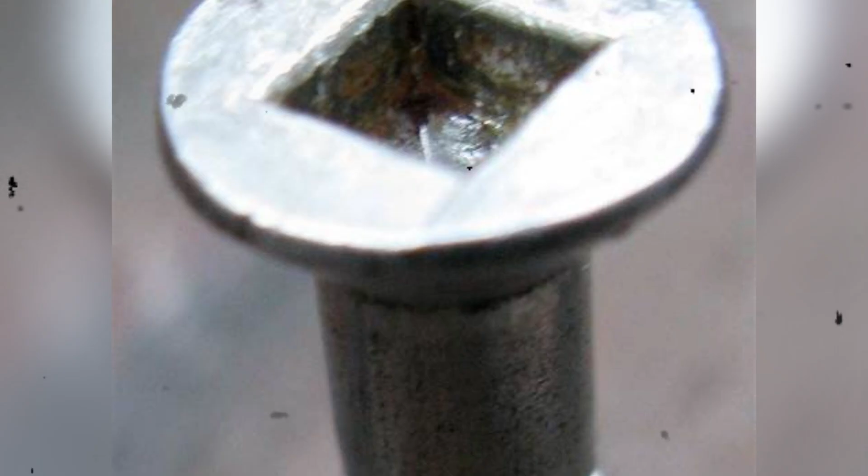In 1914, inside the sprawling automotive assembly plants of the Ford Motor Company, a small piece of Canadian hardware was quietly altering the speed of industrial production. It was a cold-formed screw with a recessed square drive, manufactured in a red brick factory in Milton, Ontario. It did not slip, it did not strip, it did not cam out under the pressure of power drivers.

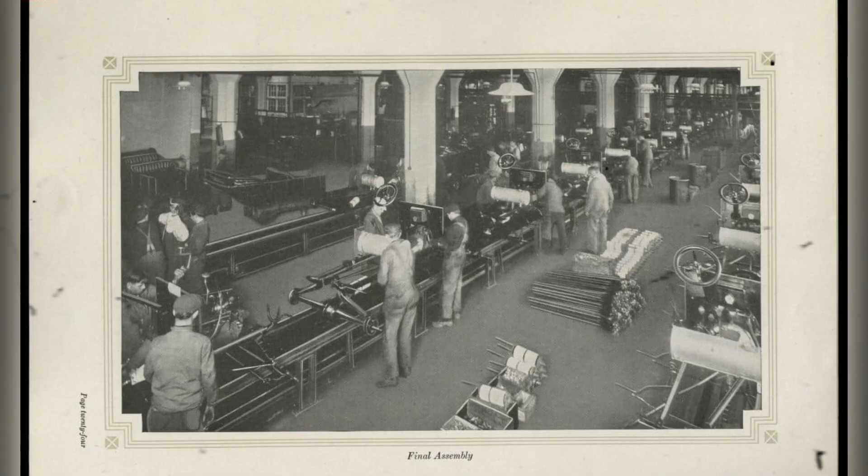Records suggest this single Milton export saved Henry Ford approximately 2 hours of assembly time per vehicle. It reduced wood damage. It prevented assembly line injuries. It was, by every mechanical measure, a flawless industrial fastener. Ford wanted it for every factory. He demanded the exclusive rights to manufacture the square drive screw in the United States.

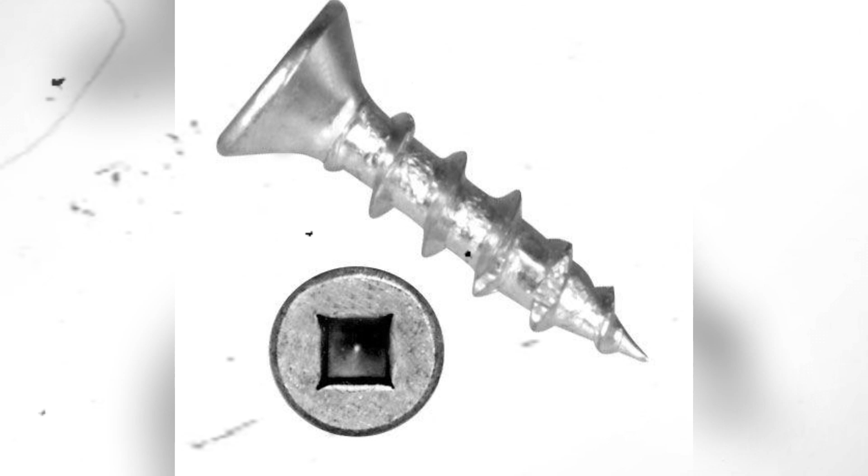But the inventor sitting in Milton refused to surrender control of his patent. He would not license the manufacturing rights. He demanded that every screw be purchased directly from his Canadian plant. That single negotiation sealed the fate of the Robertson screwdriver. It created a profound industrial paradox.

Inside Canada, the Robertson drive became the undisputed standard of the trades. Its color-coded handles, green, red, and black, would eventually populate every carpenter's belt, every logging camp workshop, and every hardware store aisle from Nova Scotia to British Columbia. It completely locked the American Phillips drive out of the domestic Canadian construction industry.

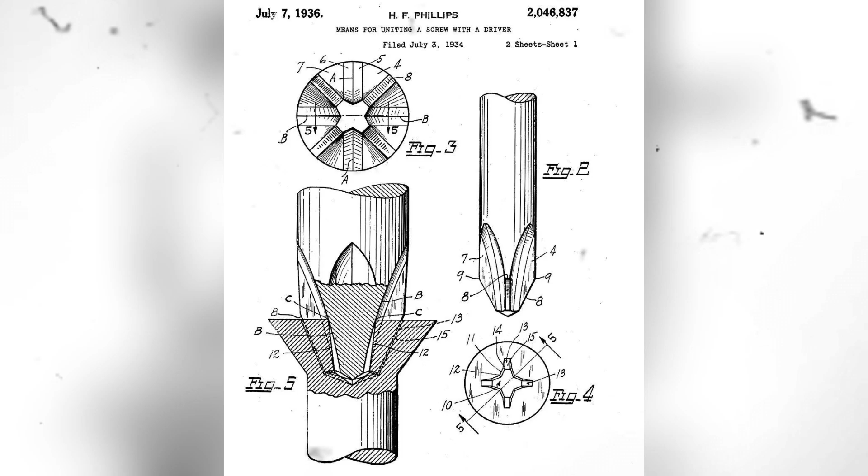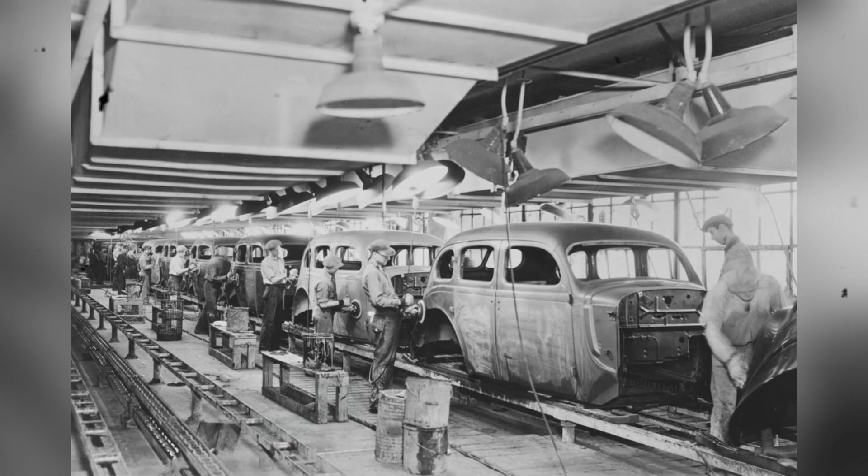But outside the Canadian border, the square drive was practically exiled. The Milton Empire secured its domestic dominance at the cost of global expansion. Decades later, the original Ontario production lines would halt, the foundational company would be absorbed by American corporate conglomerates, and the ultimate Canadian hand tool would be stripped of its independence. The perfect screw survived, but the Canadian tool-making empire behind it was slowly dismantled.

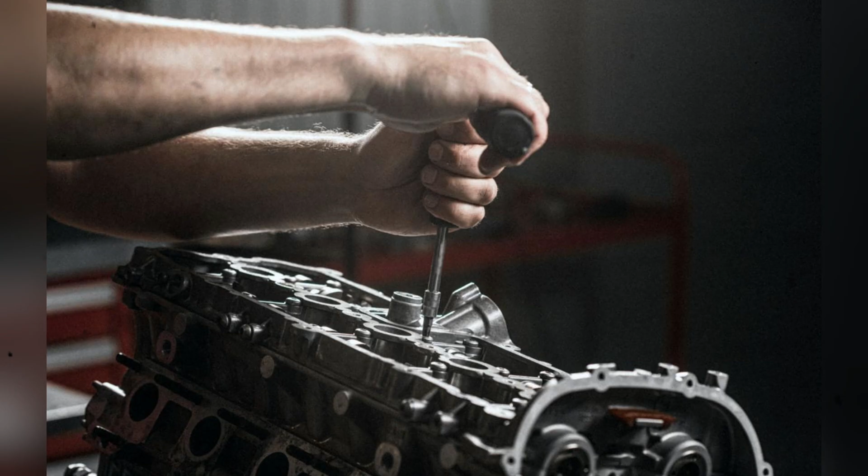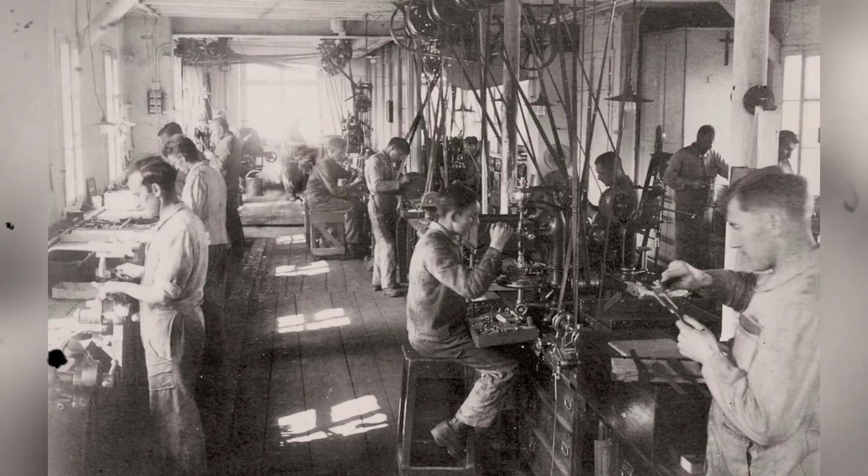When a carpenter applied torque, the blade inherently wanted to push itself out of the screw head. This mechanical rejection is known as cam out. For decades, cabinet makers in Ontario, boat builders in Nova Scotia, and mechanics in early Montreal automotive shops accepted cam out as an inevitable cost of doing business. They accepted the stripped screw heads. They accepted the gouged wood. They accepted the bloody knuckles.

The Canadian manufacturing sector was rapidly accelerating toward mass production. The era of pure craftsmanship was giving way to the era of assembly lines. Yet this entire industrial system was held back by a fastener that could not be reliably driven at high speed. The slotted screw was a bottleneck on the factory floor. It required two hands to operate, one to hold the screw and one to turn the driver.

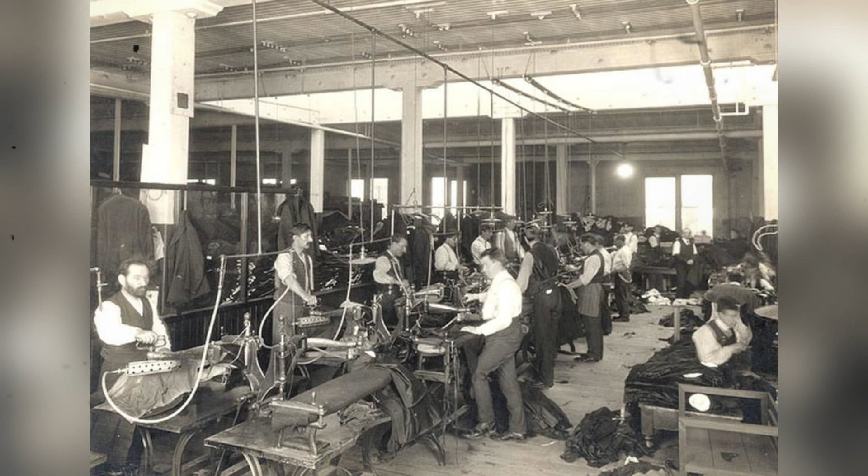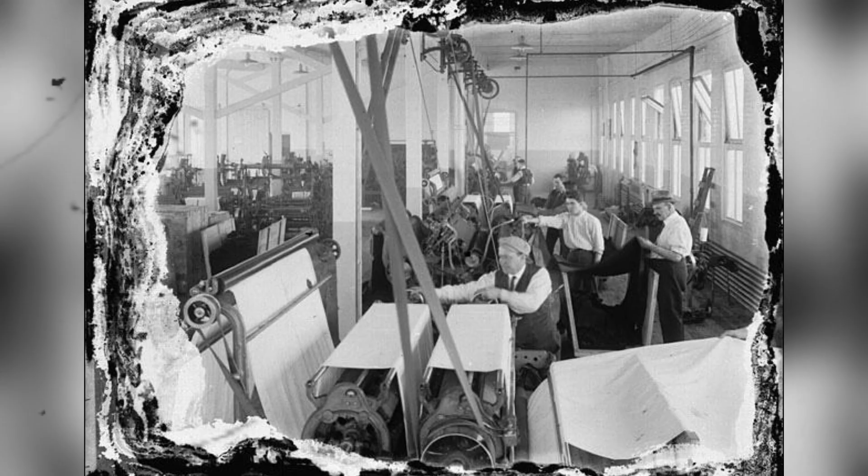If an early electric or pneumatic driver was applied to a slotted screw, the tool would violently jump from the slot, destroying the workpiece and stalling production. The Canadian industrial economy desperately needed a fastener that could handle immense rotational force without failing. The solution was born from physical injury.

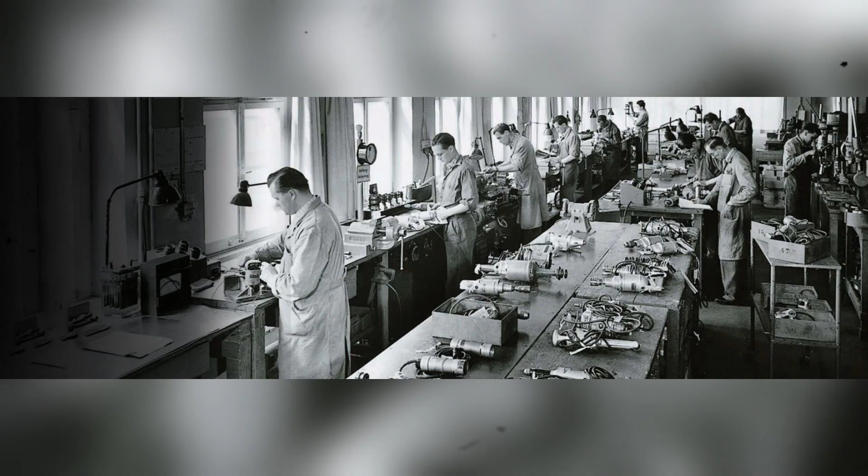Peter Lymburner Robertson was a traveling salesman from Seneca Township, Ontario. By one account, he was demonstrating a spring-loaded screwdriver to a group of potential clients on the streets of Montreal. As he applied pressure, the flat blade violently slipped from the slotted screw. The steel drove deep into his hand. It was a severe cut, but it crystallized a mechanical truth. The straight slot was fundamentally obsolete.

A recessed drive, a socket that could physically capture the tip of the screwdriver and lock it in place, was the only logical path forward for modern manufacturing. The concept of a square drive screw was not entirely new. European and American inventors had theorized it for years, but previous attempts had universally failed at the manufacturing stage.

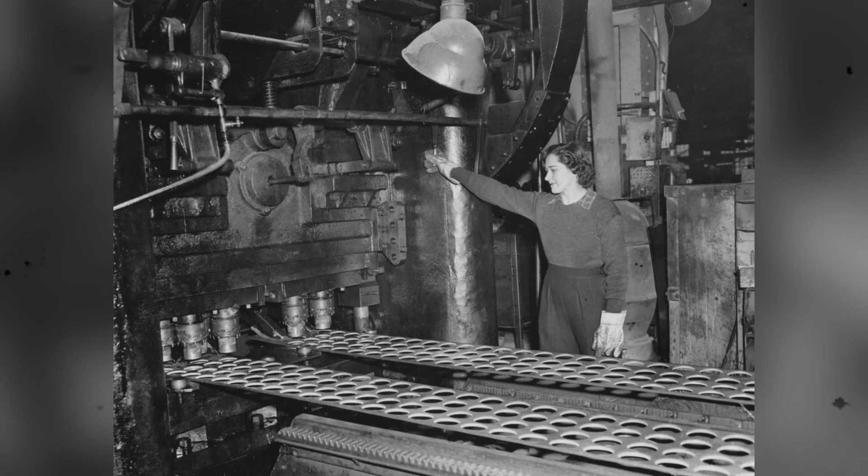If a factory tried to cut, mill, or punch a square hole into a heated screw head, the surrounding metal would weaken. The corners of the square would easily strip out under the pressure of a screwdriver. The fastener would fail before the wood was clamped tight. Robertson's genius was not just the shape of the recess, but the precise method of forging it. He developed a proprietary cold-forming process.

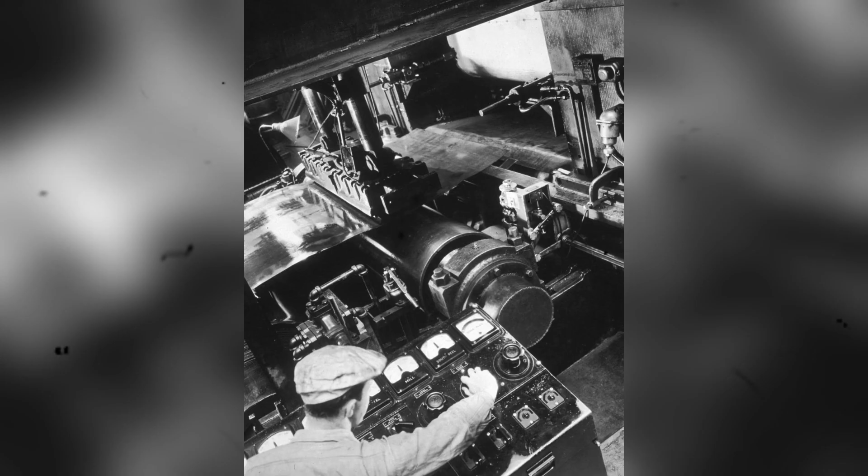A hardened steel punch would strike the cold steel wire with immense force, simultaneously shaping the dome of the screw head and pressing the tapered square recess deep into the metal. Because the steel was not heated or cut, the cold-forming process heavily compressed the metal grain around the socket. It made the walls of the square recess drastically stronger than the surrounding metal.

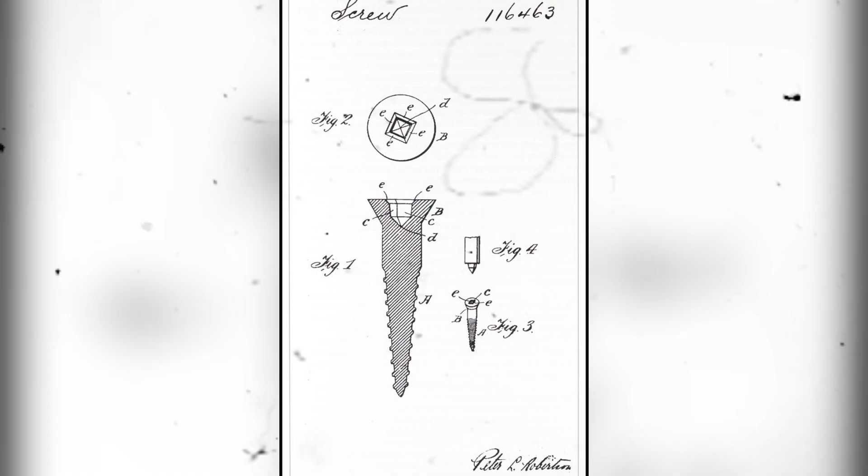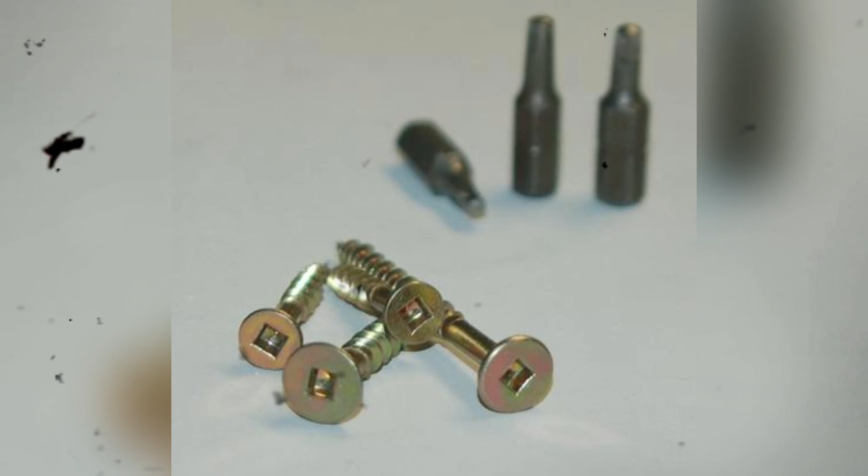It was a flawless manufacturing method. It produced a screw that was virtually indestructible under normal torque. In 1908, Robertson patented his cold-formed square drive screw. He now needed a manufacturing base to scale his invention. He found it in Milton, Ontario, a growing industrial town west of Toronto.

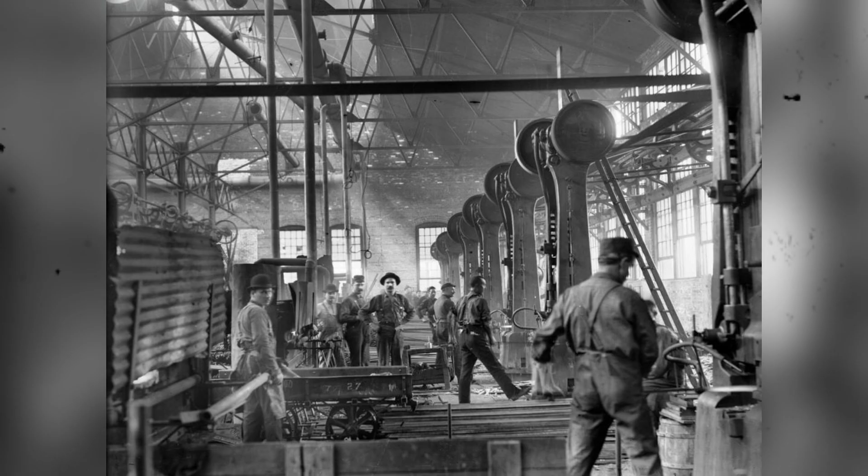The town recognized the potential of his patent and offered a municipal loan, a tax exemption, and the necessary infrastructure to build a serious tool-making operation. The P.L. Robertson Manufacturing Company was officially established in a modest brick facility on Bronte Street.

Getting the square drive screw into the Canadian market required overcoming massive industrial inertia. Factories across the country already possessed millions of slotted screws and thousands of flathead screwdrivers. Transitioning to a proprietary fastener meant changing entire workshop supply chains. Robertson aggressively marketed his invention directly to local tradesmen. The initial Canadian entry occurred through persistent demonstrations to local woodworkers and small-scale manufacturers in southern Ontario.

When a Canadian carpenter tried the Robertson screw for the first time, they discovered a radical new capability. The slight taper of the square recess allowed the screw to physically cling onto the matching tip of the screwdriver. This friction fit, known as cling, meant a worker could place the screw on the driver, extend their arm, and drive the fastener into the wood using only one hand. They did not need to hold the screw. They could drive it upside down. They could drive it at awkward angles.

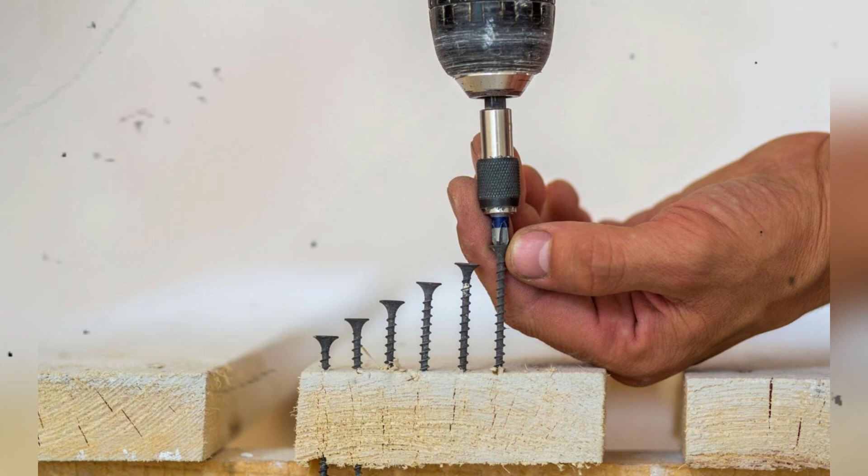The early reception in Canadian industrial circles was an absolute revelation. The T. Eaton Company, a titan of early Canadian retail and manufacturing, began using Robertson screws in their massive Toronto furniture factories to drastically speed up cabinet assembly. Early automotive bodybuilders, such as the Fisher Motor Company in Walkerville, Ontario, recognized that the square drive entirely eliminated the devastating paint scratches caused by slipping screwdrivers on assembly lines.

Local hardware stores across Halton County began stocking the new fastener, and tradesmen quickly realized its superiority over anything imported from the United States or Great Britain. The Milton factory began running at capacity. Local hardware catalogs started dedicating space to the unusual square hole. The local trades had spoken. The Canadian workshop needed a fastener that would not slip, strip, or fail under pressure.

P.L. Robertson had delivered it, and the stage was set for an unprecedented expansion into the very heart of North American heavy industry. The shift from a small Milton operation to a national industrial titan required more than just local word of mouth. It required a fundamental mechanical superiority that could be mathematically proven on a balance sheet.

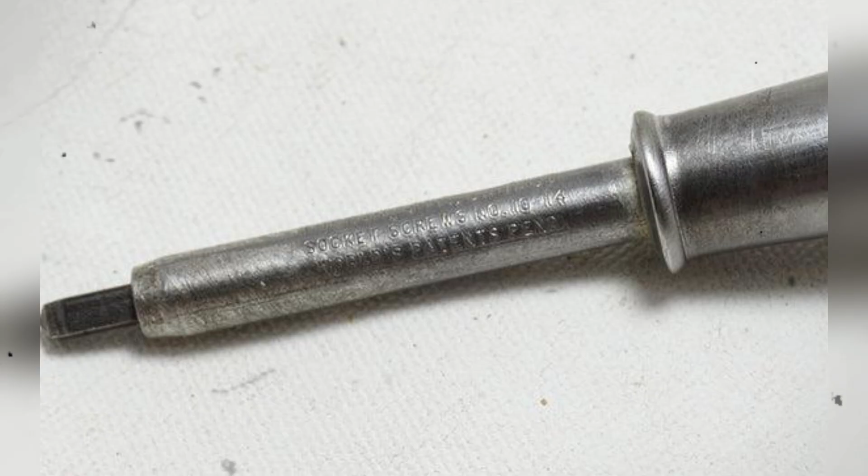The physical architecture of the Robertson fastening system was deceptively simple, yet perfectly engineered for the realities of early 20th century mass production. The recess in the screw head was not a simple punch box. It was a carefully designed, slightly tapered square socket. The matching screwdriver tip featured the exact same precise taper. This specific geometry achieved two critical mechanical functions that the straight slotted screw could never replicate.

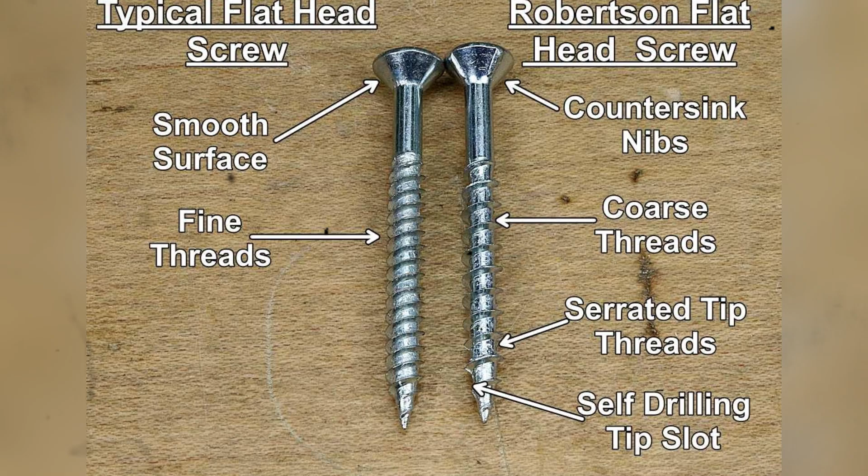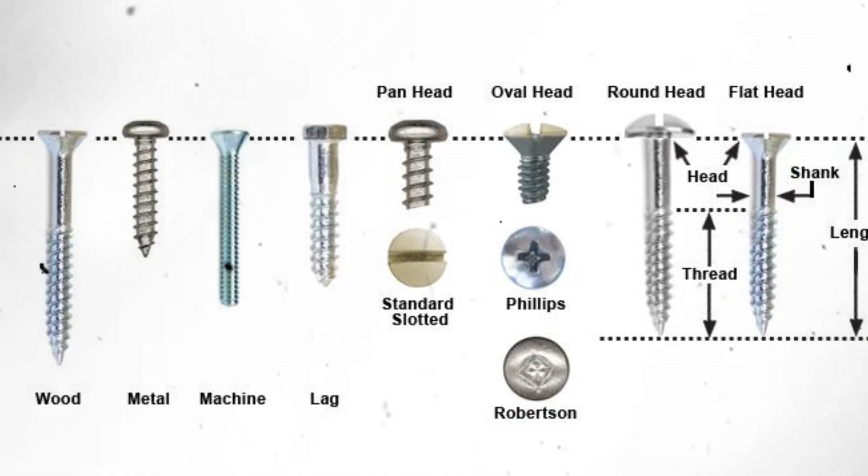First, the square drive distributed the rotational force evenly across the four interior walls of the screw head, rather than concentrating it entirely on a single thin, fragile slot. This massive increase in surface contact allowed workers to apply extreme torque without breaking the screw. Second, the slight taper created an interference fit. When the steel driver was pushed into the steel screw, the two pieces of metal physically wedged together. This mechanical wedge created cling.

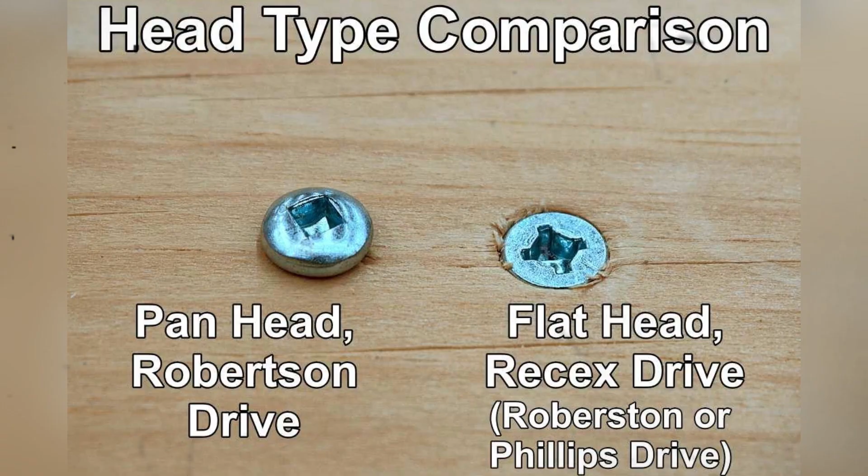A mechanic or carpenter could load a fastener onto the driver tip, extend their arm, and swing the tool like a hammer without losing the screw. In the chaotic, cramped, and rapid environment of an assembly line, the ability to drive a fastener entirely with one hand was an industrial revelation. It freed the worker's second hand to hold the workpiece, position the material, or stabilize their own body. But a brilliant design is useless if it cannot be manufactured at scale.

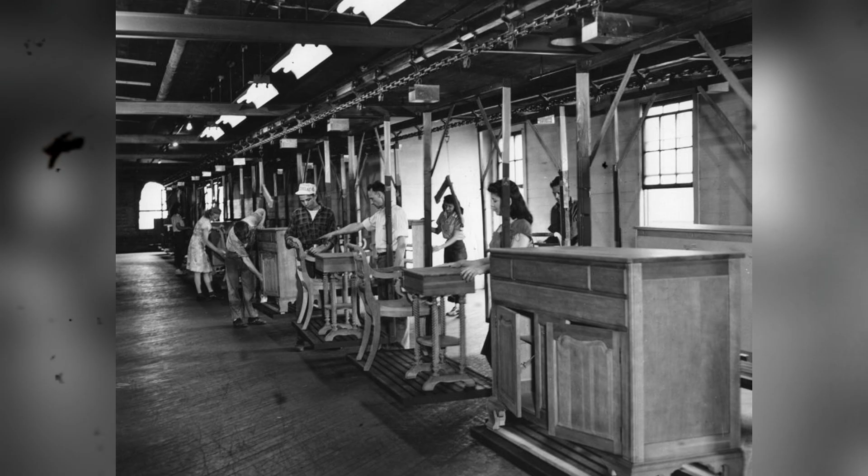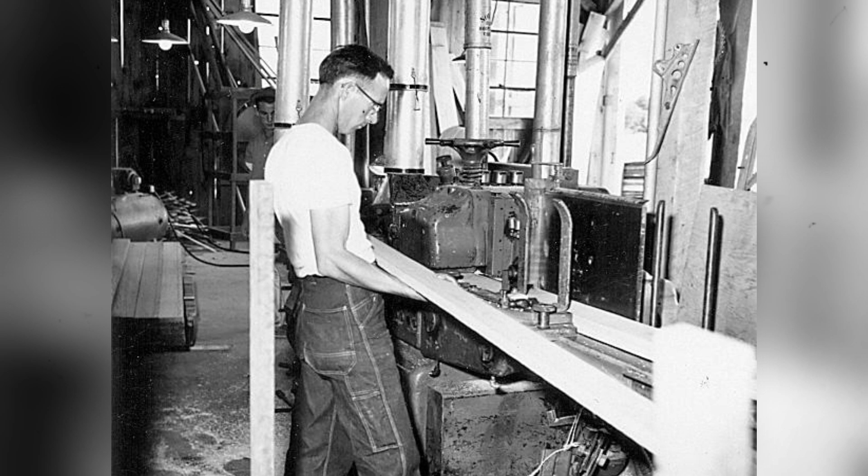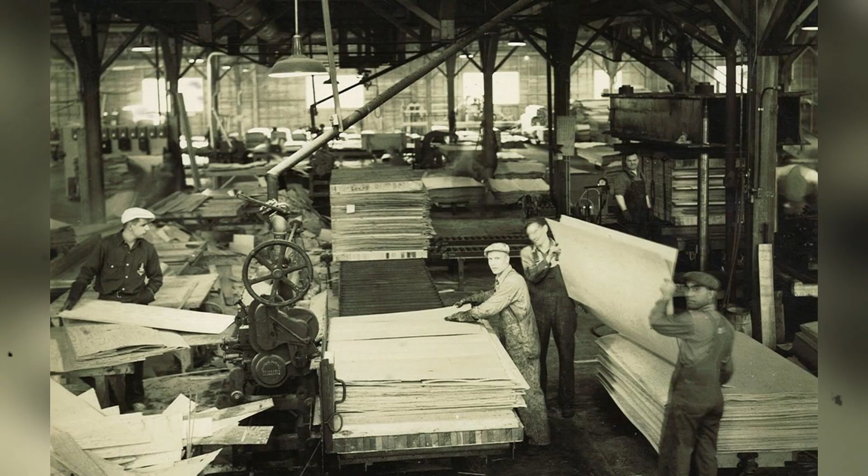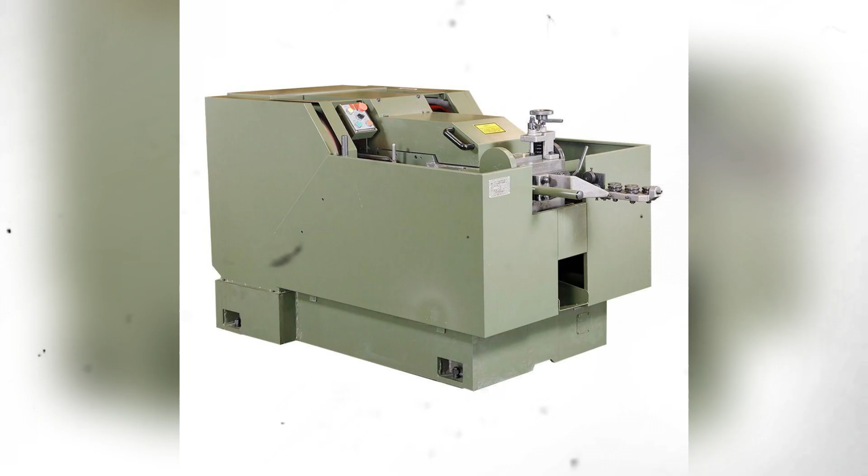P.L. Robertson's ultimate Canadian moat was his proprietary cold-forming process. To create the perfect square recess, raw, unheated steel wire was fed into massive, violently loud heading machines in the Milton factory. A hardened steel punch struck the wire with thousands of pounds of pressure, instantly forging the dome of the screw and driving the square hole deep into the center. Because the metal was not heated or cut, the cold-forming process heavily compressed the microscopic grain structure of the steel around the socket. It hardened the walls of the drive. It created a fastener that was virtually indestructible under the intense torque of industrial machinery.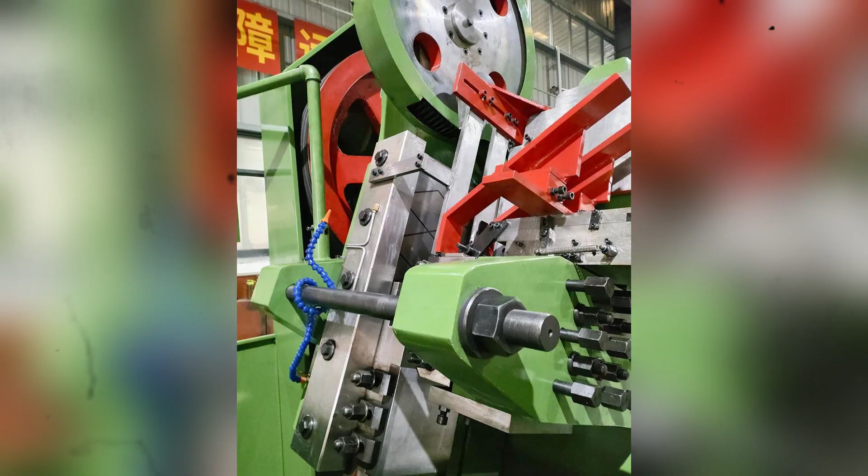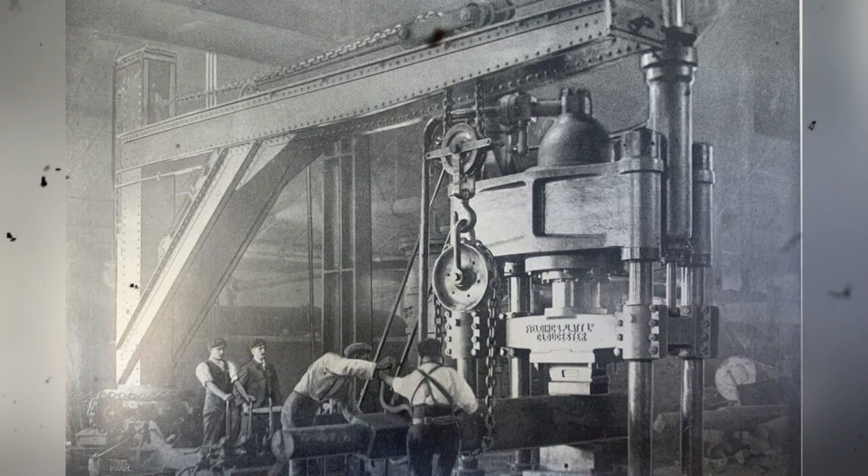The Canadian price context was initially challenging. Robertson screws were slightly more expensive to manufacture per unit than traditional slotted screws. But for large-scale manufacturers, the raw cost of the fastener was irrelevant compared to the cost of human labor and damaged materials. The slotted screw was a liability. When a driver slipped from a slotted screw, the inevitable cam-out, it frequently gouged the surrounding wood, ruined finished surfaces, and slashed the hands of the workers.

The Robertson screw eliminated cam-out. It eliminated the ruined dashboards. It eliminated the bloody knuckles. It eliminated the wasted hours spent extracting stripped fasteners. The ultimate breakthrough occurred when the Canadian automotive industry recognized this economic math.

In Windsor, Ontario, the Ford Motor Company of Canada was rapidly expanding its assembly lines to meet the exploding demand for the Model T. Early automobiles were heavily constructed of wood. Their frames, floorboards, and interior structures required thousands of driven fasteners per vehicle.

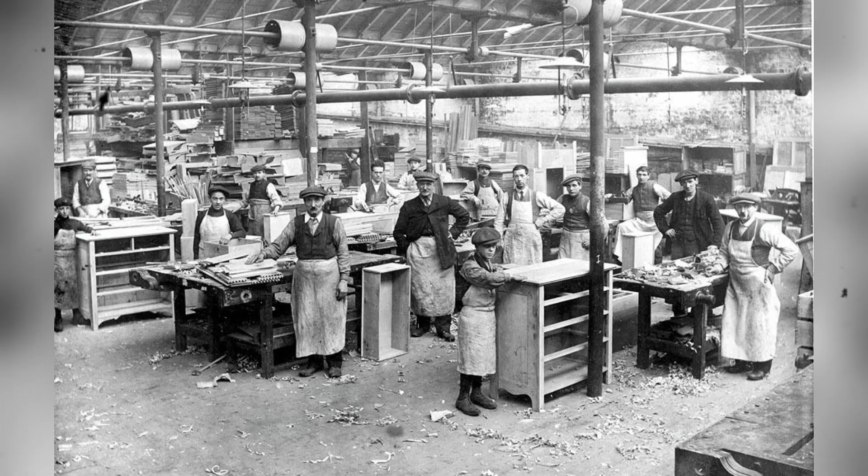When Ford of Canada adopted the Milton-made square drive, the acceleration in production was staggering. Available reports indicate that the Robertson screw saved Ford assembly lines roughly 2 hours of labor per vehicle. In the high-volume, hyper-efficient world of automotive manufacturing, 2 hours of saved time was a monumental competitive advantage.

The success in Windsor triggered a massive cascade across Canadian heavy industry. The Fisher Body Company in Walkerville, Ontario, which built the wooden bodies for numerous early automotive brands, placed massive orders with the Milton factory. The square drive allowed their workers to safely use early motorized and pneumatic driving tools, a process that was previously impossible with slotted screws.

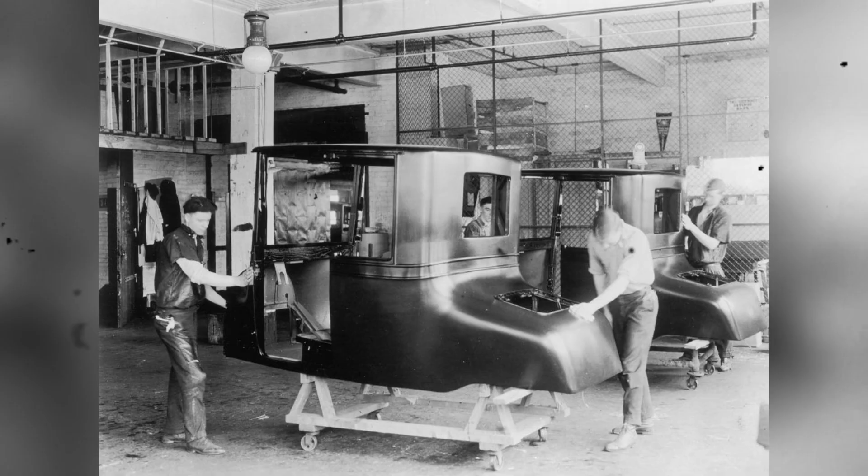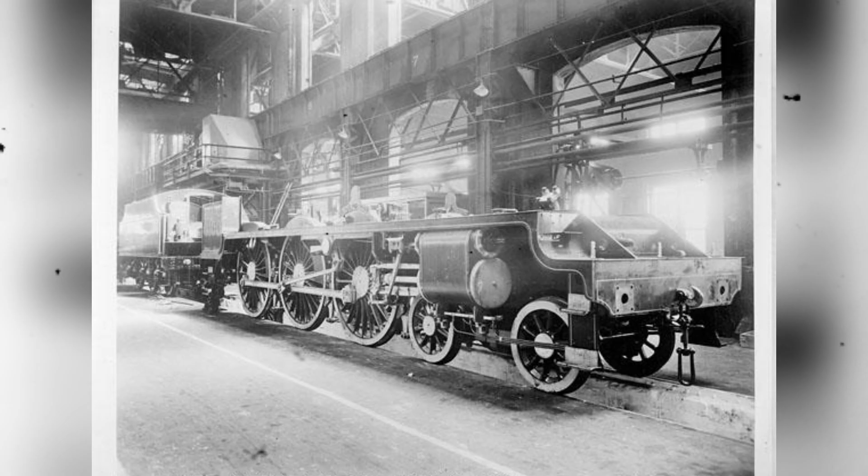This industrial adoption quickly spread beyond the automotive sector. The Canadian Pacific Railway operated the colossal Angus shops in Montreal, Quebec. It was a sprawling industrial complex where thousands of wooden boxcars and passenger carriages were constructed. The Angus shops required a fastener that could withstand the intense, constant vibration of rail travel, yet be driven fast enough to keep up with rolling assembly quotas. They adopted the Robertson drive.

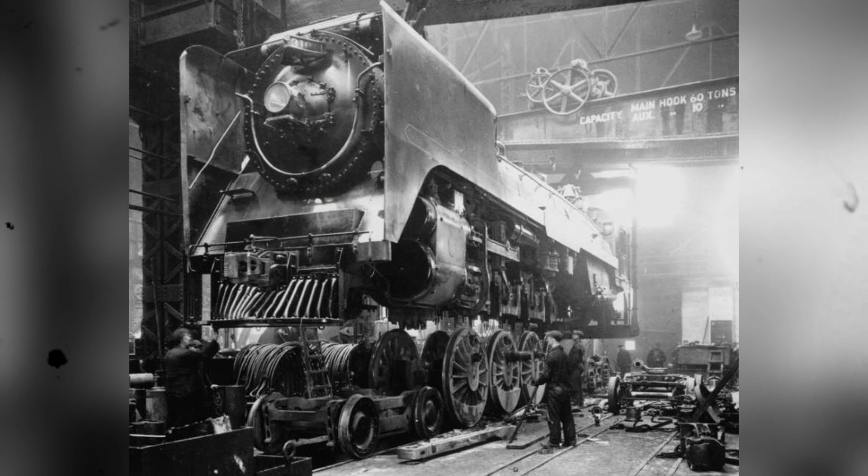The Russell Motor Car Company in Toronto integrated the fasteners into their production. The T. Eaton Company in Toronto, operating massive furniture manufacturing divisions to supply their national catalogs, transitioned their cabinet makers to the square drive. Suddenly, the Robertson screwdriver was no longer just an automotive assembly tool. It was bleeding out into the general Canadian trades.

As thousands of factory workers used the square drive at work, they began demanding it for their own personal toolboxes. Plumbers, electricians, and carpenters across Ontario realized that their traditional slotted screwdrivers were obsolete. The Milton factory aggressively expanded its distribution network to meet this demand. They secured contracts with major Canadian hardware distributors and local mercantile stores. From Halifax to Vancouver, hardware shelves began stocking the distinctive square-tipped drivers alongside massive wooden crates of Robertson fasteners.

P.L. Robertson had built a flawless industrial fortress. He held the patents. He controlled the proprietary cold-forming machinery. He dictated the manufacturing tolerances. He owned the Milton plant. He had successfully embedded his exact specific standard into the assembly lines of the nation's largest manufacturers and the toolboxes of the nation's independent tradesmen. The Canadian workshop was completely transformed, and the Robertson manufacturing empire was poised to enter an era of unprecedented glory.

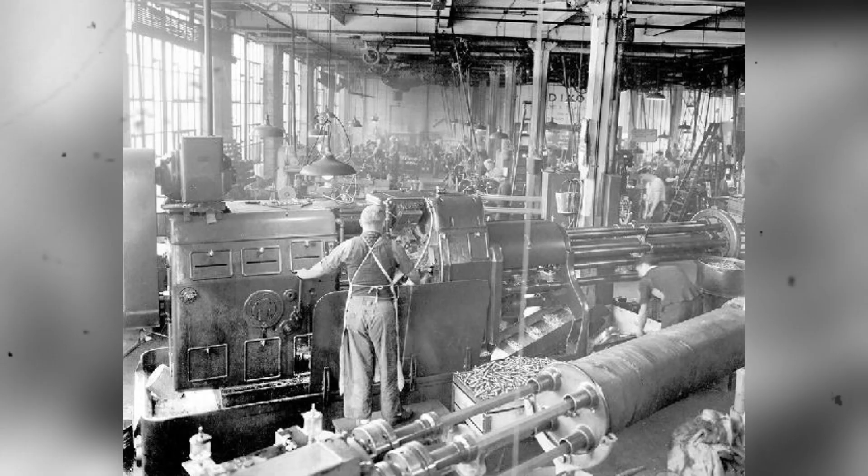By the middle of the 20th century, the P.L. Robertson Manufacturing Company was no longer just a successful local business. It was the gravitational center of the Canadian hardware industry. The original brick building on Bronte Street in Milton had metastasized into a sprawling, multi-acre industrial fortress. It was a self-contained empire of steel, noise, and constant production.

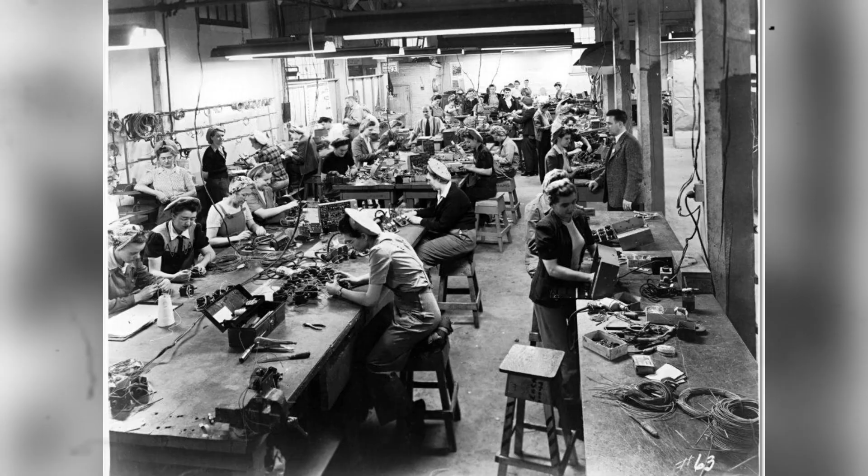The town of Milton essentially synchronized its daily rhythm to the factory whistle. Generations of Halton County families walked through the factory gates, manning the violent, deafening cold-heading machines that continuously punched raw steel wire into perfect square drive fasteners.

The true scale of the Robertson Empire was forged during the Second World War. When the Canadian government mobilized its manufacturing sector for the war effort, the demand for reliable, high-speed fasteners skyrocketed. Slotted screws were a liability in wartime production. There was no time for stripped heads, delayed assembly, or gouged aluminum. The Milton factory became a critical military supplier.

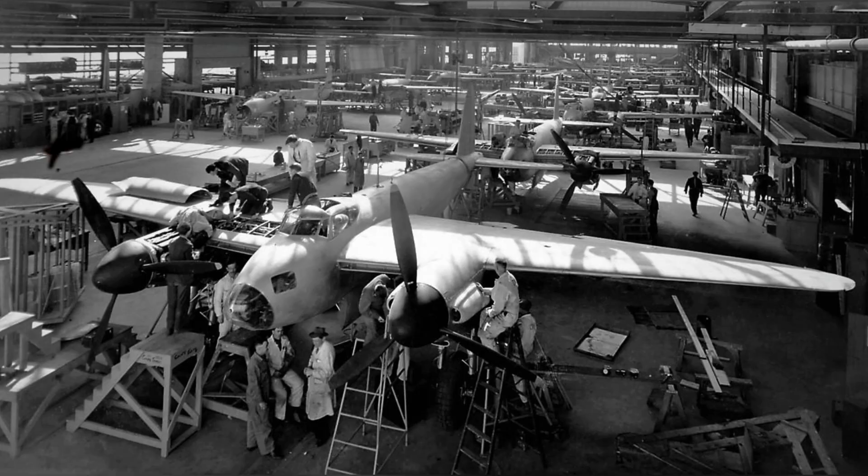When Victory Aircraft in Malton, Ontario, began constructing the legendary de Havilland Mosquito bombers, aircraft famously built almost entirely of wood, they relied heavily on Robertson screws. The precise, slip-free drive was essential for assembling the delicate, high-stress wooden airframes without damaging the surrounding material. On the eastern coast, the sprawling Halifax shipyards in Nova Scotia utilized immense quantities of Milton fasteners to construct the wooden interiors and electrical panels of Royal Canadian Navy corvettes.

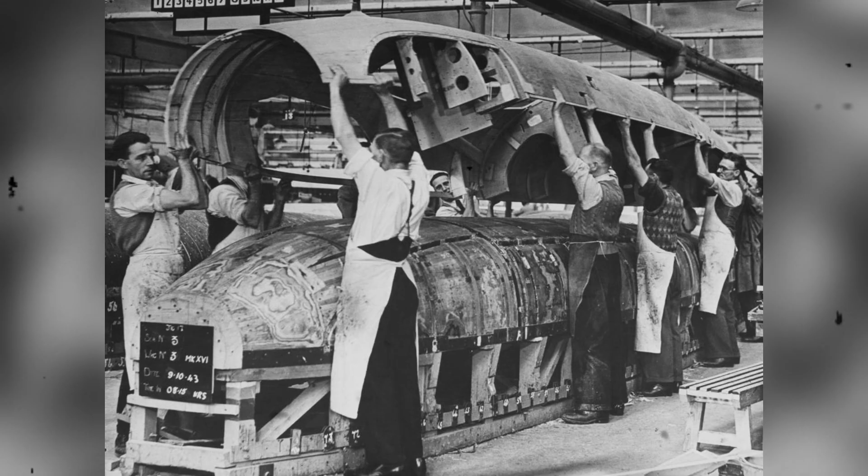The war effort required speed, standardization, and absolute reliability. P.L. Robertson delivered all three. The factory operated around the clock, churning out tens of millions of fasteners a month to feed the Canadian war machine. The square drive proved it could withstand the brutal conditions of military assembly lines just as flawlessly as it had conquered the Ford automotive plants decades earlier.

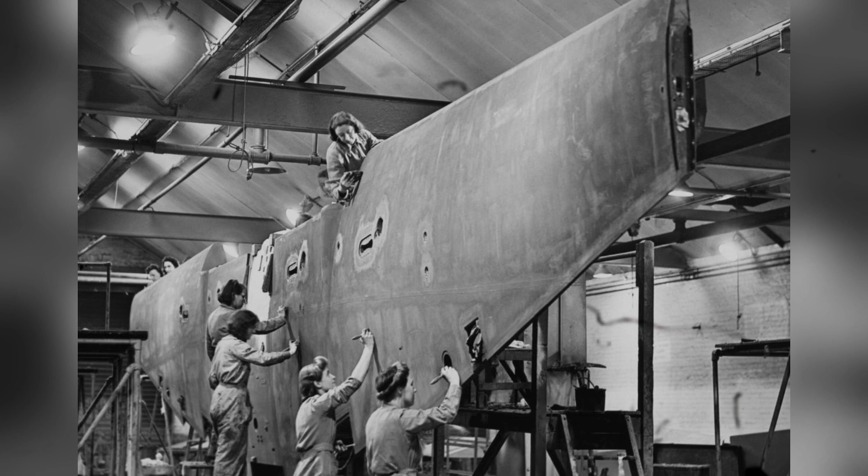When the war ended, the Milton plant did not slow down. It immediately pivoted to supply the greatest construction boom in Canadian history. The creation of the Canada Mortgage and Housing Corporation, or CMHC, triggered an unprecedented explosion of suburban development. Millions of new homes were built across Ontario, Quebec, and the western provinces. Every single one of those homes required hinges, floorboards, electrical boxes, cabinetry, and door frames. The Canadian construction industry universally standardized on the square drive.

It was during this post-war explosion that the Robertson Empire codified its most brilliant and enduring cultural innovation, the color-coded handle system. To help tradesmen instantly identify the correct screwdriver size in a dark toolbox or a cluttered workbench, the Milton factory implemented a universal visual language.

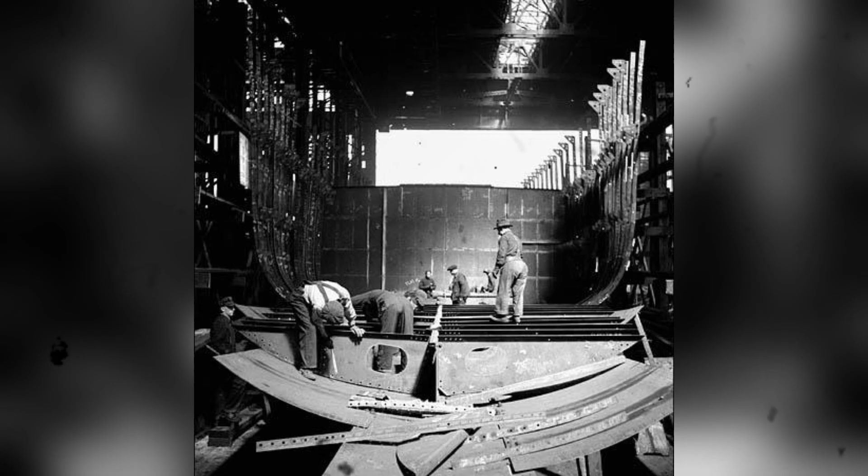The number 0 drive, used for fine cabinet work, was assigned a yellow handle. The number 1 drive, the standard for hinges and smaller hardware, was given a green handle. The number 2 drive, the absolute workhorse of the Canadian construction industry, used for framing and general carpentry, received the iconic red handle. The heavy-duty number 3 drive, reserved for massive structural screws, was marked with a black handle.

This color system bypassed the need to read small stamped numbers on a steel shank. A carpenter on a scaffold in Toronto could look down at his belt, see the red acetate handle, and instantly know he had the correct tool for the number 2 fastener in his hand. It was a triumph of Canadian industrial design. The yellow, green, red, and black handles became the unofficial flag of the Canadian tradesman.

Trade schools across the country, from the vocational programs in Vancouver to the technical institutes in Montreal, exclusively taught their apprentices using Robertson drivers. A generation of Canadian carpenters, electricians, and plumbers learned their trade holding a Milton-made tool. They learned the feeling of the interference fit. They learned the speed of one-handed fastening.

The straight slotted screwdriver was effectively banished from the professional Canadian job site, relegated to the bottom drawer, used only for prying open paint cans or scraping dried glue. The Canadian workshop had completely assimilated the square drive. It was no longer just a tool, it was an expectation.

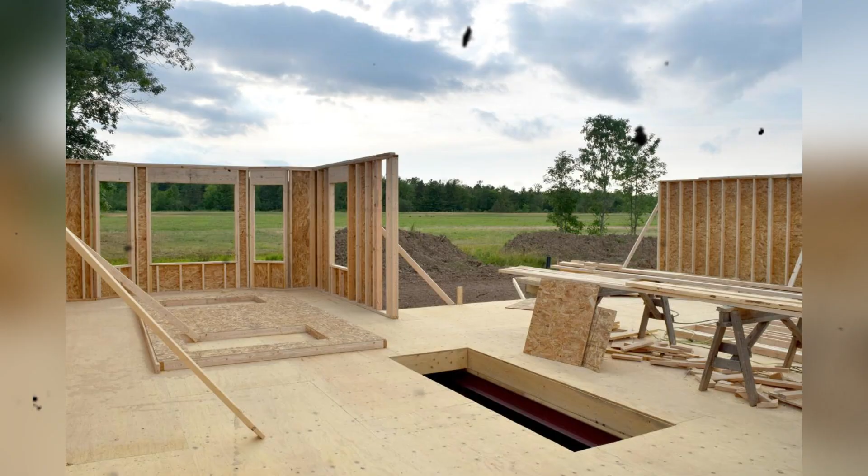The retail conquest of the Canadian market was absolute. When a tradesman walked into a Canadian Tire store in the 1970s, they were not looking for a generic fastener. They were looking for the iconic green cardboard boxes printed with the P.L. Robertson name. Entire aisles were dedicated to the Milton Empire. Massive pegboards displayed rows of acetate-handled screwdrivers, categorized strictly by the yellow, green, red, and black color system.

The distribution network stretched from coast to coast. J.H. Ashdown Hardware in Winnipeg, the massive Western mercantile giant, shipped trainloads of Robertson fasteners across the prairies to supply agricultural repair shops and local hardware dealers. In St. Jacobs, Ontario, the newly formed Home Hardware Cooperative made the square drive a foundational pillar of its national inventory. The Eaton's and Sears Canada catalogs prominently featured Robertson driver sets in their tool sections, ensuring that even the most remote farming communities in Saskatchewan had direct access to the slip-free technology.

The Milton factory had evolved into a massive, highly optimized industrial ecosystem. By the late 20th century, the Bronte Street plant employed hundreds of local workers. The production floor was a deafening expanse of mechanical power. Massive spools of raw Canadian steel wire were fed into batteries of cold-heading machines. The headers punched the square recess, the thread rollers violently pressed the helical threads into the shanks, and massive heat-treating furnaces hardened the metal to exact specifications.

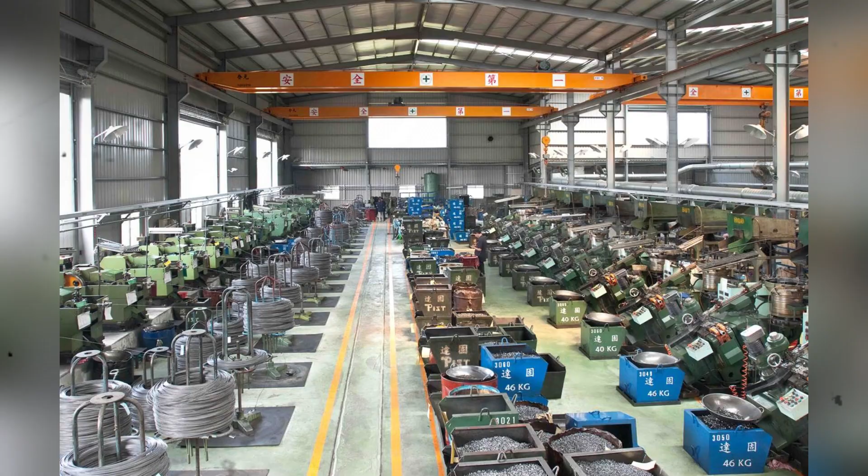The square drive found its way into highly specialized Canadian industries. The recreational vehicle and mobile home manufacturers in Alberta relied on Robertson screws because the extreme vibration of highway transport would violently shake slotted or Phillips screws loose. The deep, tight interference fit of the Milton square drive locked the wooden frames together permanently. Electricians wiring the massive hydroelectric dams in Quebec relied on the long-shank Robertson drivers to securely fasten terminal blocks inside deep electrical panels without dropping the hardware into the machinery.

This was the peak of the Canadian workshop experience. To reach into a leather tool pouch and pull out a red-handled Robertson screwdriver was to hold a flawless piece of domestic engineering. It was a tool that solved a universal industrial problem, manufactured entirely within the borders of Ontario, distributed through national retail networks, and driven into the spruce frames of millions of Canadian homes.

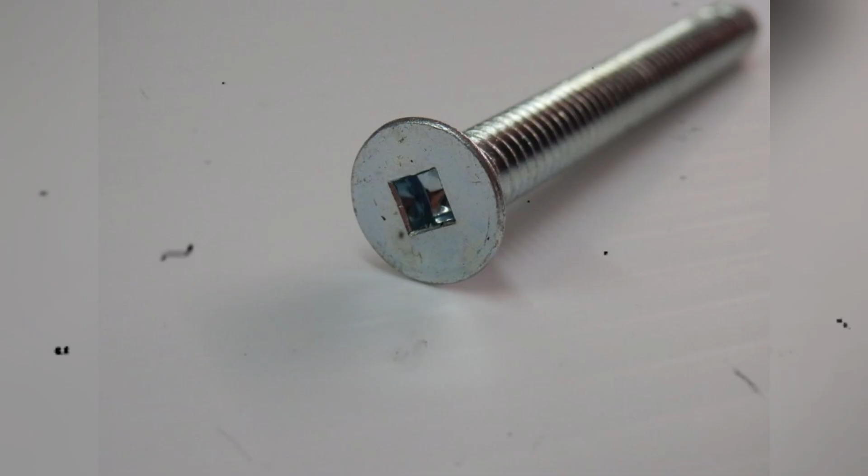P.L. Robertson had built a self-sustaining industrial loop. The Milton factory had achieved total market saturation. Every framing crew in Calgary, every boatyard in Halifax, and every assembly line in Windsor relied on the precise, tapered geometry of the square recess. It was a domestic empire without equal, but this massive scale masked a fatal vulnerability. The entire Robertson operation was perfectly optimized to feed a single, isolated market.

The fortress was impenetrable from the inside, but it was entirely cut off from the global economy. The perfect screw had conquered the nation, but the decisions of the past had guaranteed it would never conquer the world. The collapse of the Milton toolmaking empire was not triggered by a failure of engineering. It was triggered by a fatal miscalculation of industrial leverage.

The systemic fracture of the P.L. Robertson Manufacturing Company did not begin in the late 20th century. The turning point occurred decades earlier, precisely at the moment the square drive was poised to conquer the American automotive industry. By all historical accounts, Henry Ford recognized the absolute mechanical superiority of the cold-form square drive. His early Canadian assembly lines in Windsor had proven that the Milton fastener saved immense amounts of labor, prevented material damage, and vastly improved production speed.

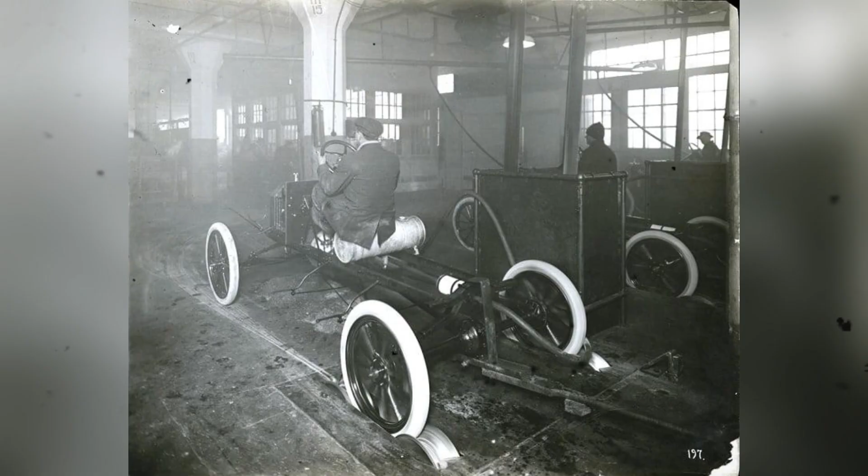Ford wanted to standardize the entire Ford Motor Company, the largest industrial manufacturing system on the planet, on the Robertson fastener. But Ford demanded supply security. The American industrial machine could not rely on a single independent factory in Ontario to feed its global assembly lines. A border dispute, a railway strike, or a catastrophic fire at the Milton plant could paralyze Ford's entire automotive production. Therefore, Ford demanded the rights to license the patent. He wanted to manufacture the square drive screws in his own factories or license multiple American steel mills to produce them simultaneously. P.L. Robertson refused.

He had previously suffered a disastrous licensing agreement in Great Britain, an ordeal where he temporarily lost control of his patents, his capital, and his international manufacturing rights. That European failure left him fiercely protective of his proprietary cold-forming process. He refused to license the manufacturing rights to anyone. He demanded that Henry Ford purchase the fasteners directly from the Milton plant, or through a wholly owned subsidiary that Robertson completely controlled. Ford withdrew. The Ford Motor Company would not be held hostage by a Canadian supplier. The negotiation collapsed, and with it, the single greatest opportunity for Canadian hand tool dominance in history.

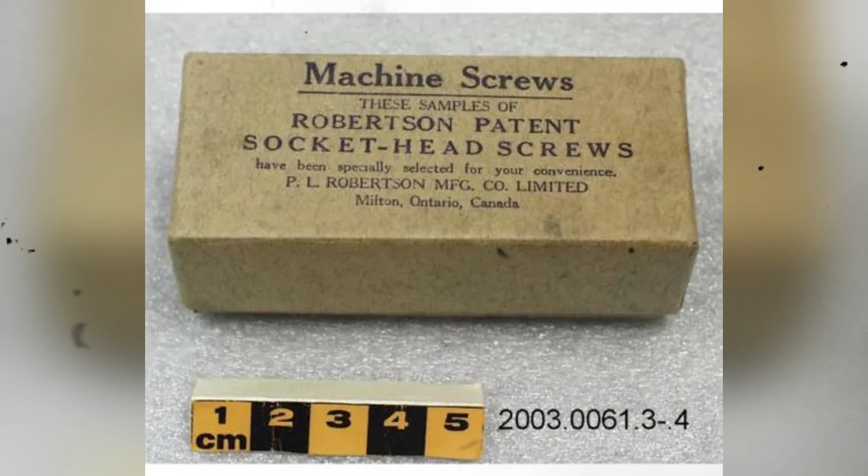This refusal created a massive vacuum in the American industrial market. The United States manufacturing sector desperately needed a recess-driven screw to replace the obsolete slotted fastener. In the 1930s, an American businessman named Henry F. Phillips provided the solution. He patented the crosshead drive. Mechanically, the Phillips drive was fundamentally inferior to the Robertson for manual trade work. It possessed sloping internal walls specifically designed to cam out. It was engineered to forcefully eject the screwdriver tip to prevent automated heavy torque assembly machines from over-tightening the fastener. It damaged the screw head by design. It required intense forward pressure to keep the driver engaged. It was everything the Canadian square drive had successfully eliminated.

But Henry F. Phillips understood the systemic power of corporate licensing. Phillips did not want to build a sprawling factory. He did not want to manufacture screws. He simply wanted to license the crosshead design to every massive steel mill and fastener factory in the United States. General Motors adopted the Phillips drive for the 1936 Cadillac assembly lines. The American military adopted it to standardize wartime production. The United States hardware market completely surrendered to the crosshead design. The Canadian tool-making empire was permanently locked out of the largest consumer and industrial market on Earth. The perfect square drive was effectively quarantined north of the 49th parallel.

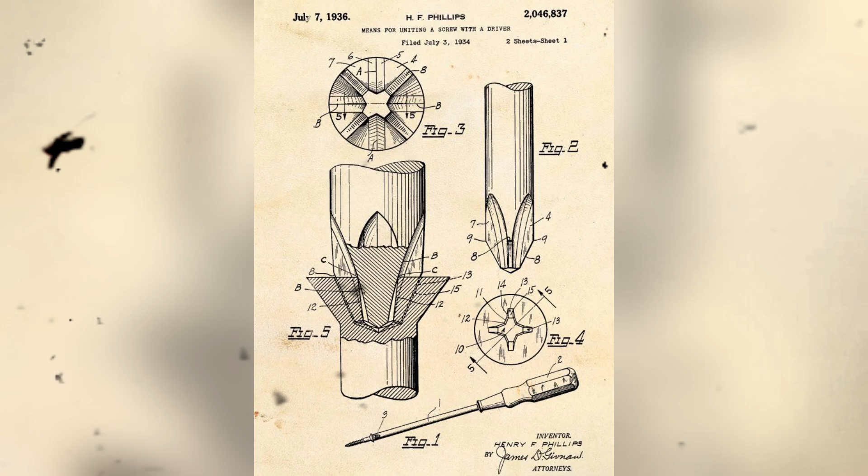For decades, the sheer, overwhelming volume of the domestic Canadian construction boom masked this fatal vulnerability. The Milton factory was running at maximum capacity. The green, red, and black handles were dominating Canadian Tire shelves, but a tool empire cannot survive indefinitely on a single isolated market. This isolation created a frustrating, bifurcated reality for the Canadian tradesman. Because the United States had standardized on Phillips, every imported American automobile, refrigerator, industrial machine, and consumer appliance sold in Canada was assembled with crosshead screws. Canadian mechanics and electricians were forced to carry both systems. They used their beloved, flawless Robertson drivers for domestic construction, and they reluctantly used their Phillips drivers to repair the endless flood of American imports.

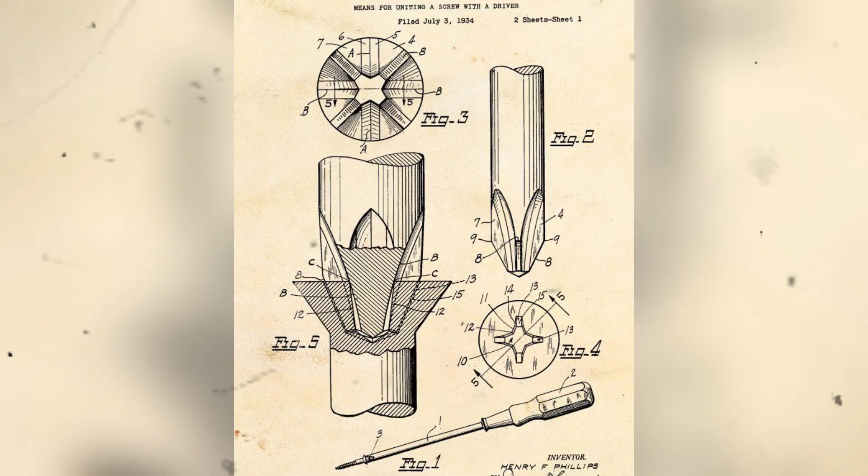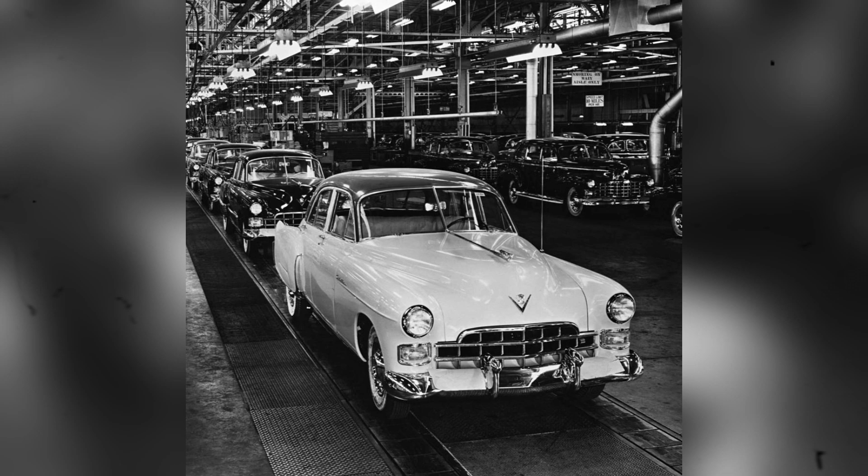In 1951, P.L. Robertson died. The visionary founder who had transformed a small brick building on Bronte Street into a national industrial titan was gone. The family company continued operating, maintaining its absolute domestic monopoly throughout the 1950s and 1960s. However, without its fiercely independent founder, the company slowly transitioned from an engineering-driven fortress into a vulnerable corporate asset. The economic foundations of Canadian manufacturing were beginning to shift. The cost of raw Canadian steel was rising. The cost of unionized Canadian labor in Halton County was increasing.

Canadian hardware chains were evolving into massive corporate entities. They were fiercely competing on price, and they began demanding lower wholesale costs from their domestic suppliers. The Milton factory was suddenly facing intense margin pressure. It was a massive facility, producing a premium, flawless fastener in a high-cost Canadian manufacturing environment, trapped inside a single country. The Canadian tool-making fortress was completely surrounded. The corporate conglomerates were circling, and the original independence of the Milton Empire was about to be permanently broken.

In 1968, the era of total independence officially ended. The P.L. Robertson Manufacturing Company was acquired by Procor Limited, a massive Canadian industrial firm. However, Procor itself was a subsidiary. This corporate absorption initiated a slow, systemic dismantling of the Canadian manufacturing loop. The new ownership structure stripped the company of its agility. For decades, the Robertson brand was passed between holding companies and massive conglomerates.

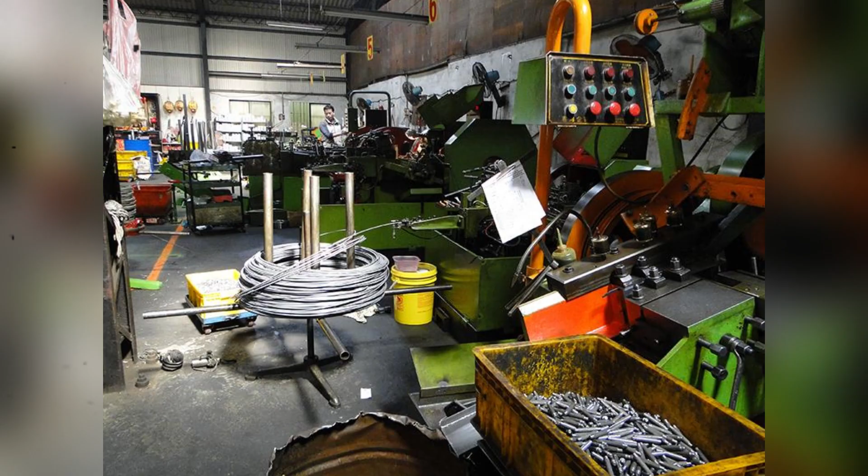These imported fasteners were fundamentally inferior. The offshore foundries did not utilize P.L. Robertson's proprietary cold-forming machinery. They simply stamped or punched a square hole into cheap, heated, soft steel. They ignored the highly specific, microscopic taper of the inner walls. Without that precise taper, there was no interference fit. Without the interference fit, there was no mechanical cling.

When a modern Canadian carpenter reached into a bulk bin at a massive big box hardware store and loaded a generic offshore screw onto their driver, the magic of the Milton design was completely gone. The screw wobbled on the tip. It fell off the driver. When heavy torque was applied, the soft, stamped steel yielded. The corners of the square recess instantly stripped out into a useless circle. The generic imports behaved exactly like the flawed, destructive fasteners that P.L. Robertson had eradicated a century earlier.

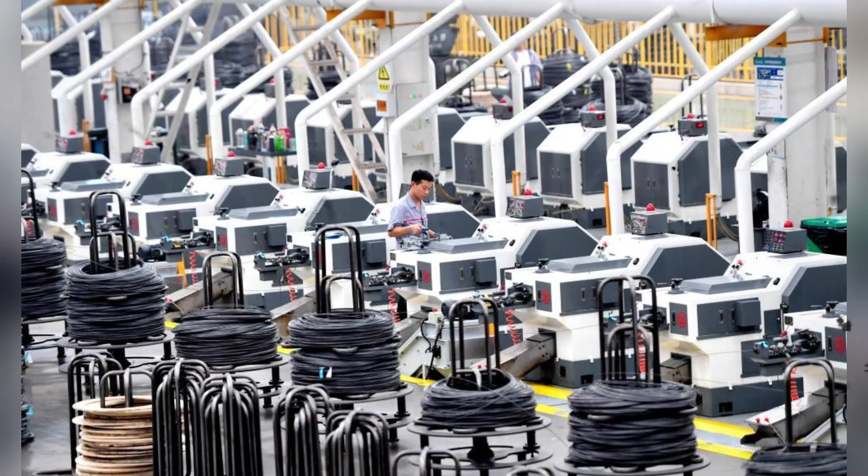But the modern hardware retail system prioritized volume and inventory cost over flawless mechanical geometry. The massive retail chains, Home Depot, Rona, and the modernized Canadian Tire, began allocating their primary shelf space to bulk bins of cheap imported, generic square drive fasteners. The original, authentic Robertson boxes were pushed to the premium aisles. The Milton factory was suddenly forced to compete on price against massive Asian industrial complexes that possessed a fraction of the labor and material costs.

The American corporate ownership of the Robertson brand analyzed this brutal retail math. Operating a massive unionized steel facility in Halton County, Ontario, was deemed economically inefficient. The cost of Canadian steel, Canadian electricity, and Canadian manufacturing labor could not be reconciled with the retail demand for cheap hardware. To survive the retail price war, the corporate ownership executed the ultimate retreat. The company began systematically outsourcing its manufacturing.

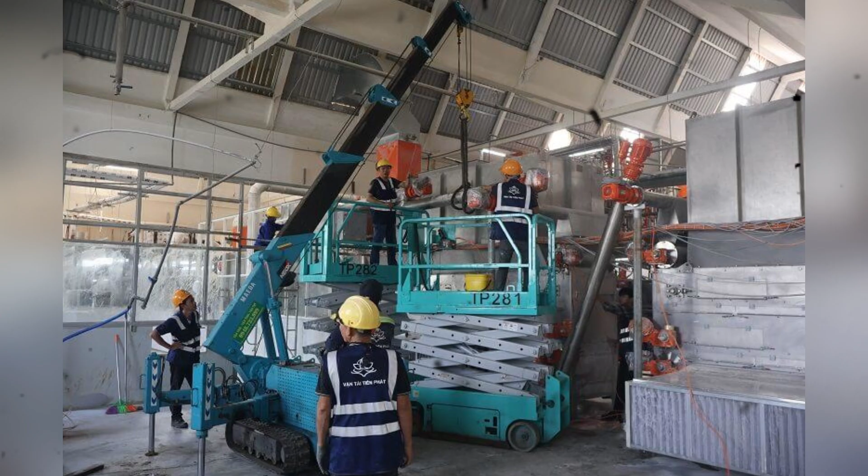The authentic Robertson brand survived. The precise engineering specifications were maintained on their premium lines. The iconic green cardboard boxes remained on the shelves, but the steel inside those boxes was no longer forged on Bronte Street. The production was slowly shifted to massive fastener factories in China. The core physical reality of the Canadian toolmaking empire was quietly hollowed out.

The town of Milton was rapidly changing. The sprawling agricultural lands surrounding the factory were being paved over. The town was transforming into a massive commuter suburb for the Greater Toronto area. The local economy no longer required an industrial anchor. The massive footprint of the Bronte Street plant became far more valuable as commercial real estate than as a functioning tool factory. The corporate retreat accelerated.

The massive cold-heading machines were powered down. The workforce was drastically reduced. The deafening roar of Canadian steel wire being violently punched into perfect, square drives faded away. The factory whistle stopped blowing. The local supply chain collapsed. The Milton gates were locked. The original brick buildings were abandoned. The manufacturing lines stopped. The machines were dismantled. The workforce was dismissed. The factory floor was silenced. The domestic empire folded.

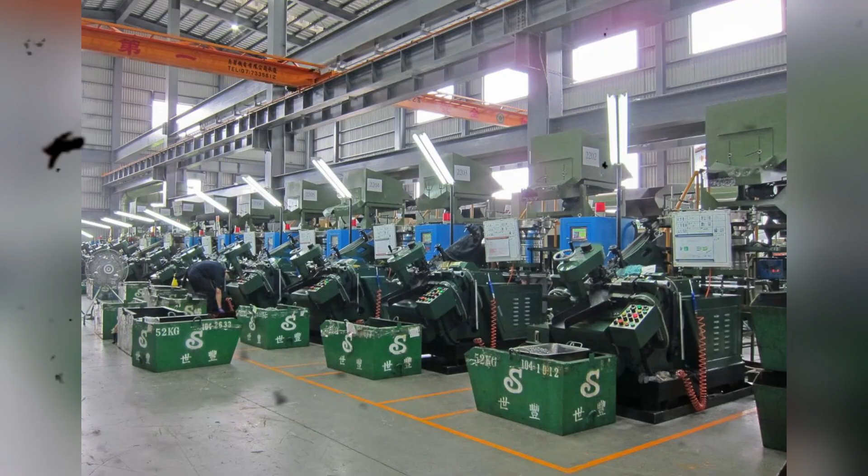Today, the P.L. Robertson brand still survives in the Canadian retail landscape. You can walk into any hardware store from St. John's to Victoria and find the iconic green cardboard packaging resting on the shelves. But the corporate entity operating under that famous name is a hollow reflection of the original Milton empire. The modern brand is a heavily managed subsidiary of a massive American holding company. The vast majority of the steel inside those modern green boxes is no longer forged in Ontario. It is stamped, pressed, and shipped from massive industrial foundries in Asia. The company that invented the cold-form square drive is now largely an importer of its own legacy.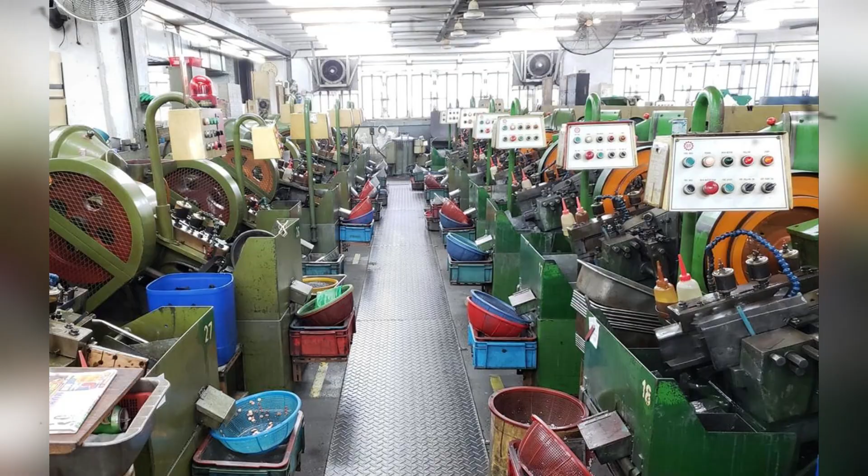Yet across the Canadian provinces, a quiet, stubborn preservation movement exists. It is not organized in formal museums or historical societies, but inside the battered metal toolboxes of veteran carpenters, retired machinists, and heritage woodworkers. There is an active, deeply committed community of Canadian tool collectors who refuse to purchase modern, outsourced drivers. They spend their weekends hunting through flea markets in Aberfoyle, estate sales in rural Ontario, and agricultural auctions in the prairies. They are searching for the original cellulose acetate handles.

They know the distinct, slightly acidic smell of aging vintage plastic. They look for the specific, deeply stamped letters, PLR, on the hardened steel shank. They separate the genuine Milton production from the modern generic imports. They seek these original Canadian drivers because the mechanical truth of 1908 remains entirely valid today. An original, cold-formed Robertson screwdriver possesses a physical exactness that modern, mass-produced generic tools simply cannot replicate.

When a Canadian carpenter slides a vintage, red-handled No. 2 driver into an original cold-formed Milton screw, the mechanical magic instantly returns. The interference fit is absolute. The cling is undeniable. A worker can hold the tool horizontally, aggressively shake the handle, and the steel fastener will not drop. The tool becomes a seamless extension of the worker's arm.

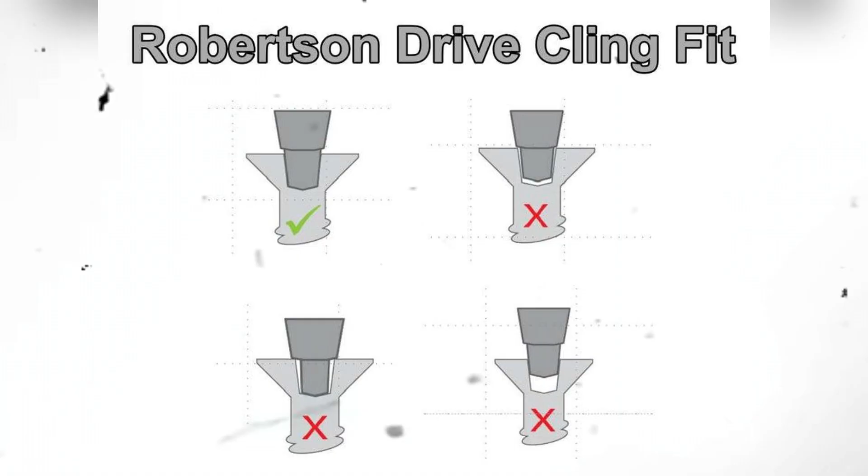It is a physical reminder of an era when a manufacturer prioritized the flawless completion of the task over the fractional reduction of retail costs. The steel does not yield. The wood does not strip. The design works perfectly. There is a profound, almost tragic irony in the global legacy of the square drive.

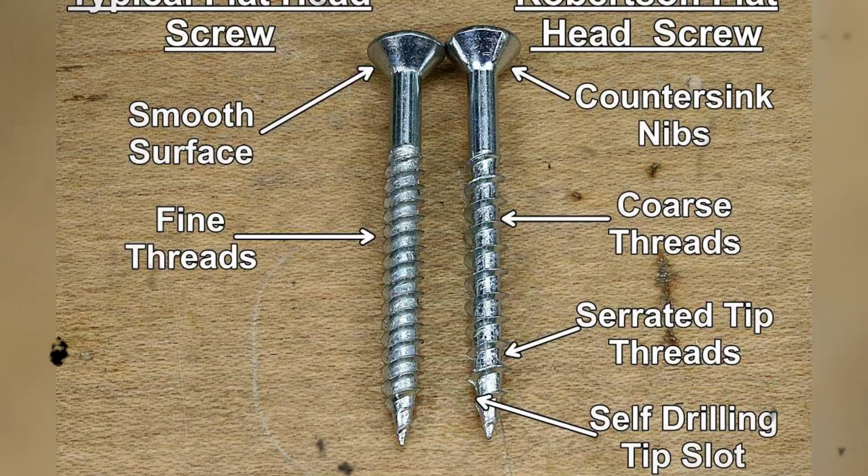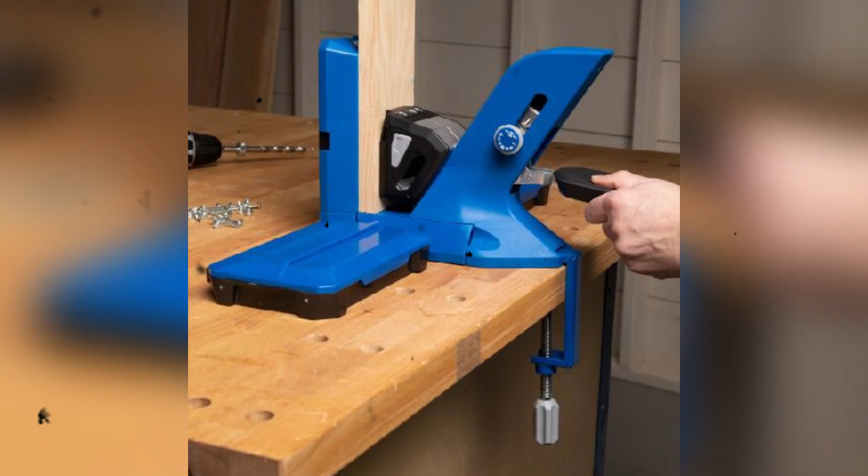More than a century after Henry Ford aggressively rejected P.L. Robertson's strict manufacturing terms, the American industrial sector is finally realizing what the Canadian trades intuitively knew in 1908. High-end custom cabinet makers, specialized architectural builders, and fine furniture craftsmen in the United States have quietly abandoned the Phillips drive. They are currently importing millions of specialized fasteners to assemble their premium woodworking projects.

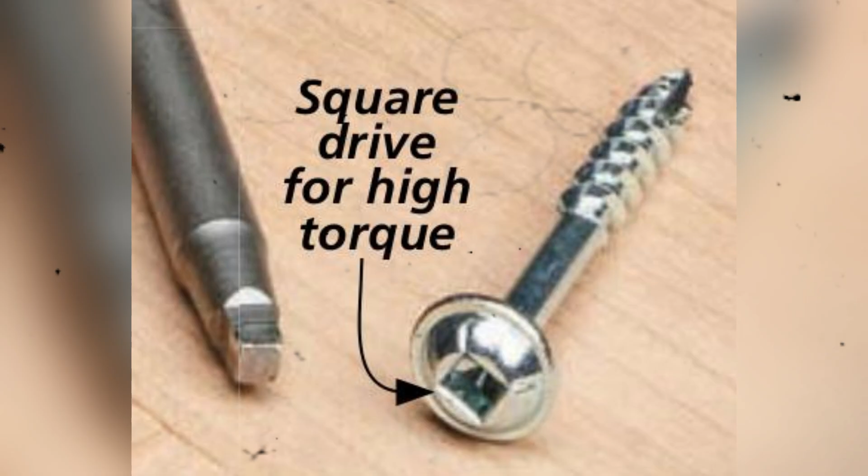Massive American tool companies have built entire modern woodworking systems, such as specialized pocket-hole joinery jigs, entirely around the exact same square recess that Robertson invented. They are adopting the identical mechanical geometry that Ford walked away from. However, because the original patents expired decades ago, the American market rarely refers to it by the name of the Ontario traveling salesman. They simply call it a square recess or a pocket-hole screw. The Canadian invention finally conquered the American workshop, but the Canadian tool-making empire received none of the credit and none of the capital.

If you drive into Milton, Ontario today, the physical evidence of this colossal industrial achievement is practically erased. The town is no longer an isolated, self-sustaining manufacturing powerhouse. It has been absorbed into the sprawling, affluent commuter belt of the Greater Toronto Area. The vast geographic footprint of the original Bronte Street factory has been irreversibly fragmented.

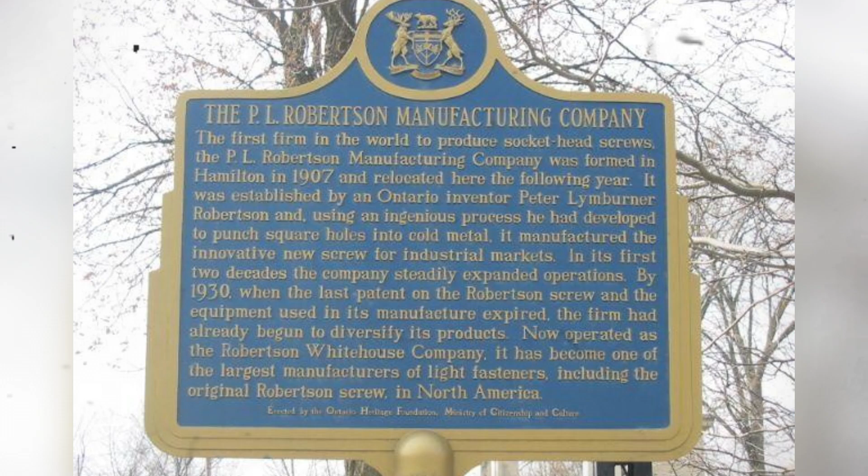The massive, thick brick walls that once vibrated with the deafening, earth-shaking thunder of cold-heading machinery have been heavily redeveloped or demolished. Where generations of Halton County families once stood over glowing heat-treating furnaces to forge the perfect industrial fastener, there are now modern commercial retail plazas, commuter parking lots, and quiet suburban streets.

The factory whistle that once dictated the daily rhythm of an entire Canadian county has been permanently silenced. The knowledge of the machinists, the skill of the tool and die makers, and the raw industrial capability of the plant have completely evaporated. The Canadian manufacturing loop is permanently broken.

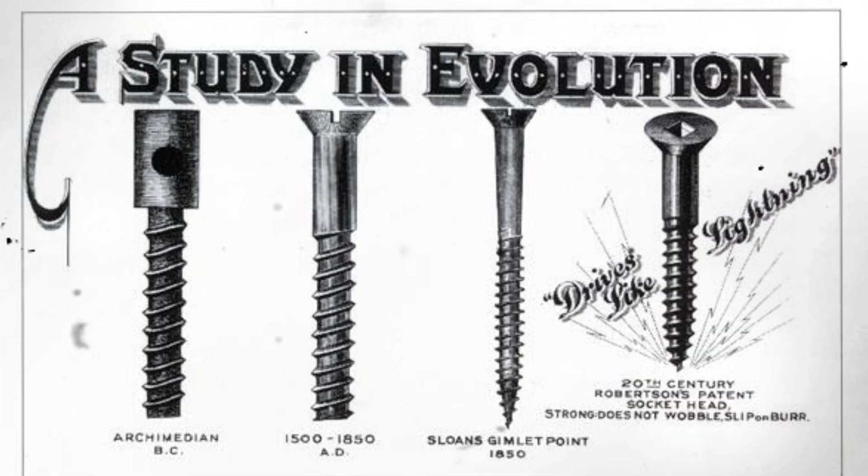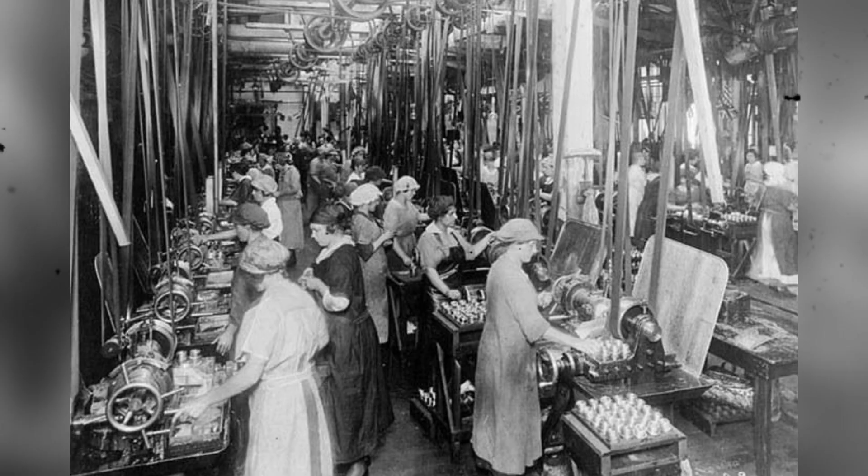The story of the Robertson screwdriver is the ultimate paradox of Canadian industrial design. It was a flawless, revolutionary invention that successfully solved a universal mechanical failure. It conquered the Canadian workshop through sheer, undeniable engineering superiority. It protected the hands of the workers, it accelerated the assembly of the nation, and it became an enduring cultural symbol of domestic craftsmanship. But an industrial tool empire cannot survive indefinitely on engineering alone.

It requires massive, aggressive global scale. It requires immense international leverage. It requires the ruthlessness to dictate terms to a globalized market. P.L. Robertson built the perfect tool, but he built it inside an impenetrable domestic fortress. When those fortress walls were eventually breached by shifting supply chains, relentless corporate consolidation, and the brutal math of globalized big-box retail, the manufacturing system rapidly collapsed, even as the tool itself survived.

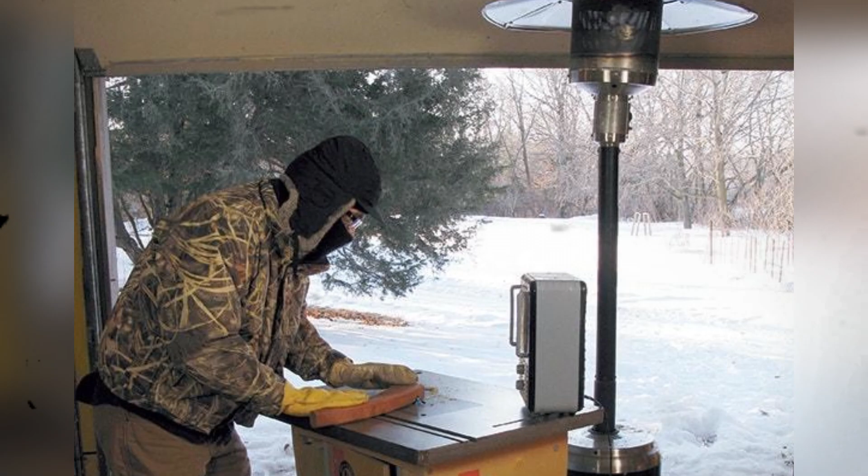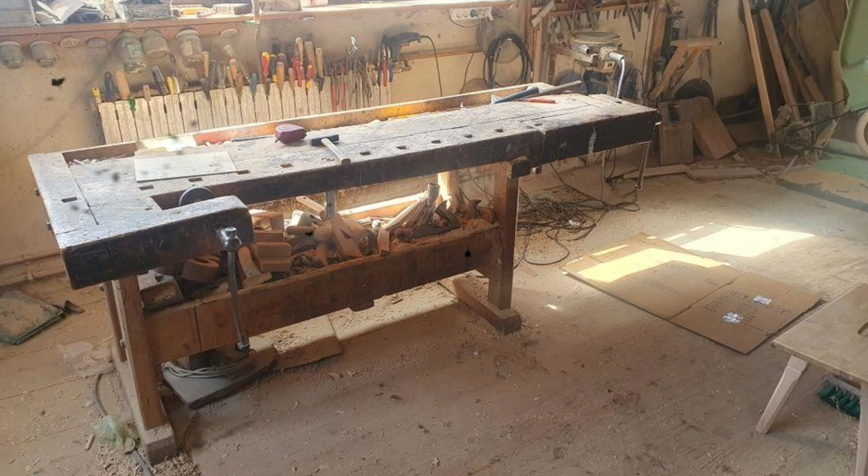The Milton factory is gone, the American conglomerates own the brand, and the offshore foundries forge the steel. But inside a freezing, unheated garage in rural Saskatchewan, an original, deeply scratched red-handled screwdriver still hangs above a heavy wooden workbench, waiting for the next generation to grip the handle and turn the screw.